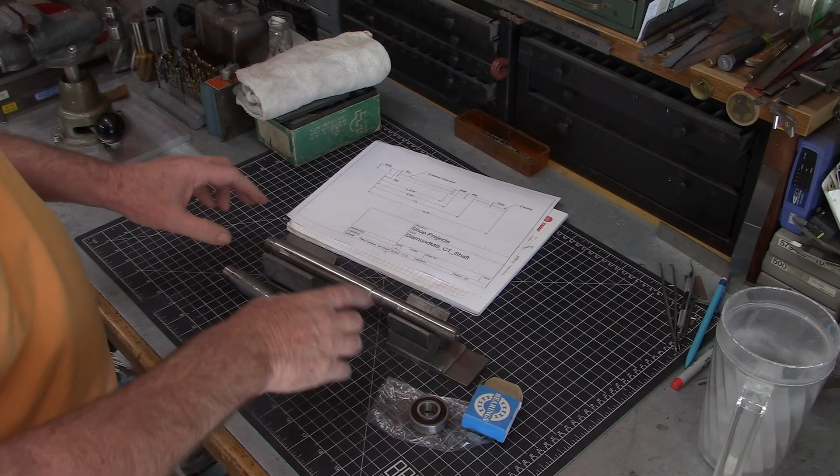Hey guys, alright so this is our countershaft for the diamond mill. Remember we had a problem with this, and I was going to go ahead and just duplicate and make another shaft. I've made a hand sketch and also one in Fusion. I need all the practice I can get in Fusion, so I always try to draw stuff in Fusion when I can. Yeah, so the problem with this shaft is the bearing fits are worn.

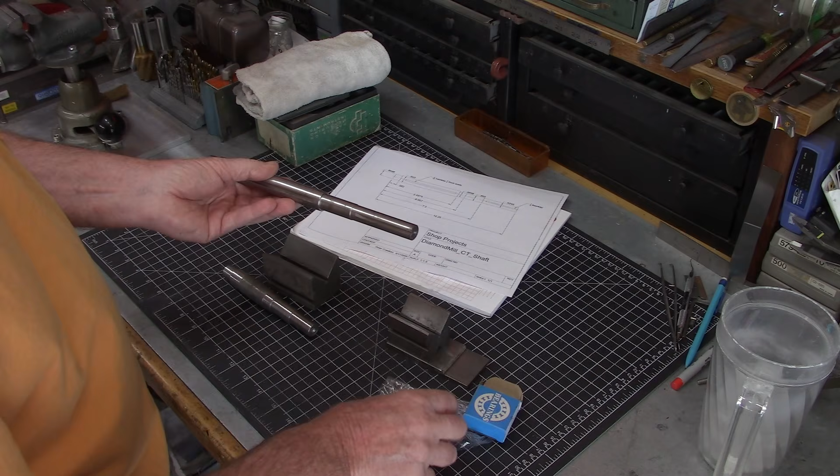So that should be a press fit, and it even rattles on there. It's quite a bit of wear. This end not as bad, but still not acceptable.

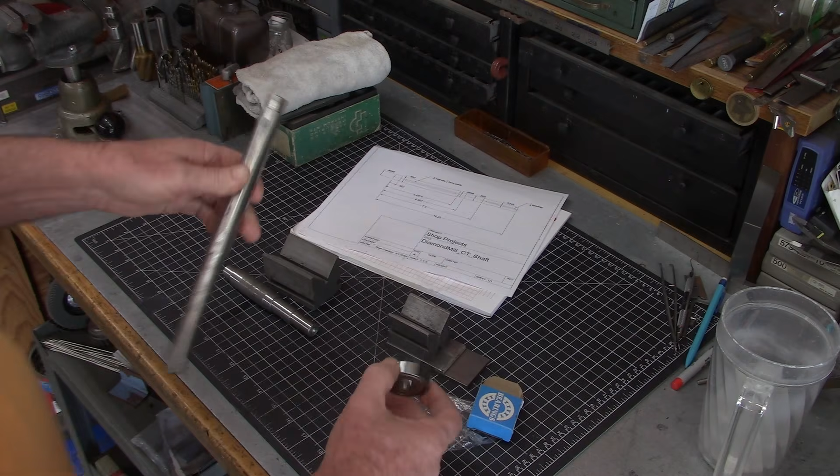So my first thought was just make a new shaft. You know, it's not that complicated. But I want to try a weld buildup. I haven't done that, and it'd be a good process to learn, so I want to give it a try.

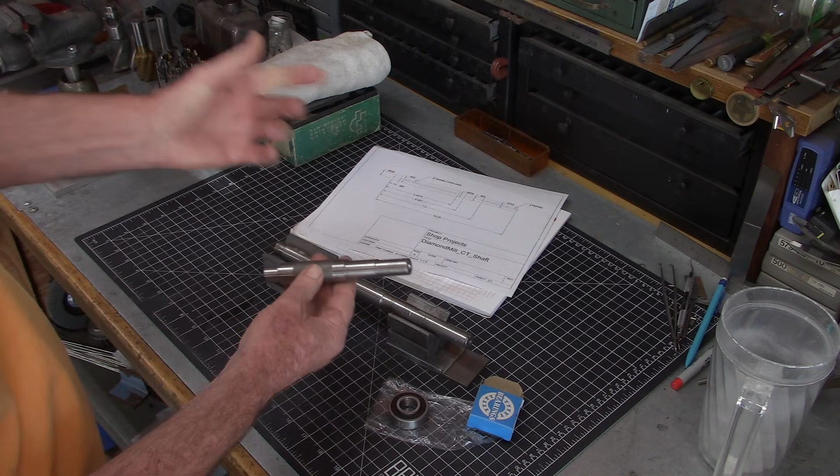I made up a little sample shaft out of just some scrap. I think it's just mild steel, to do a little practice first before we attack this one. Hopefully this is not leaded stock.

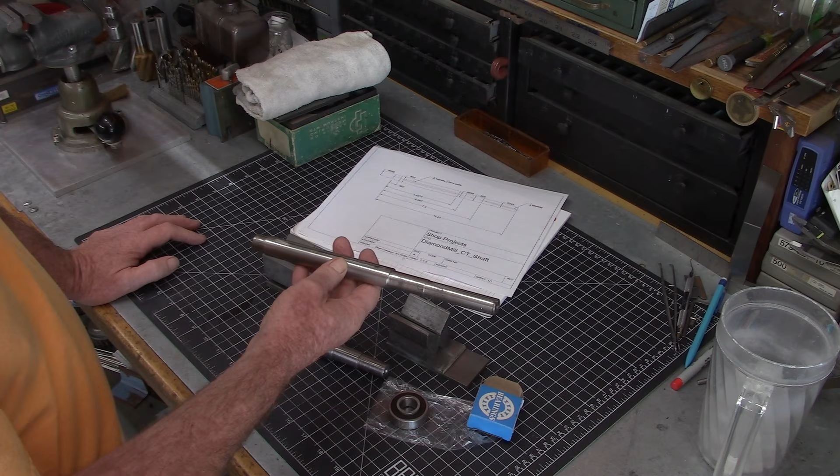You're not supposed to be able to weld leaded stock like 12L14. I don't know what type of reaction it would give you, but I guess we'll cross that bridge when we get there. If we screw it up, we'll just make a whole new shaft.

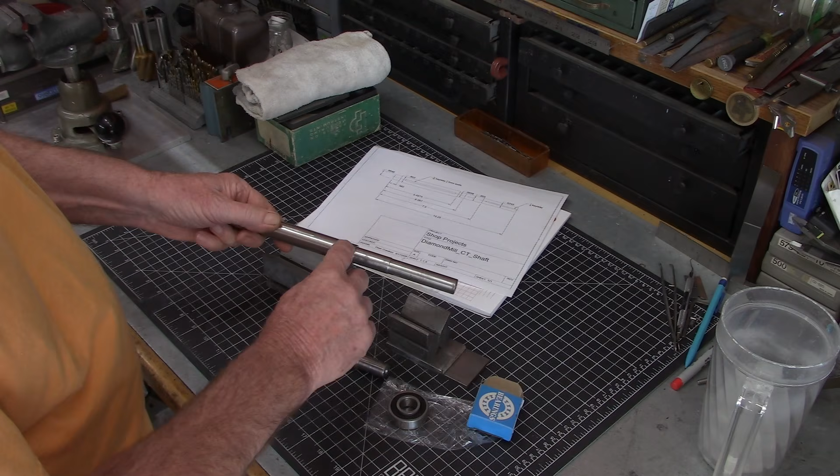The other thing I'm worried about is warpage. So I don't have a welding positioner or rotator. So I'm going to do a bead on one side, rotate 180 degrees, do another bead, let it cool, come back, and just keep working my way around back and forth until we get it all the way around. Same on both sides. Hopefully that'll keep the warpage to a minimum.

Okay, all right, well let's take a look at the welding equipment.

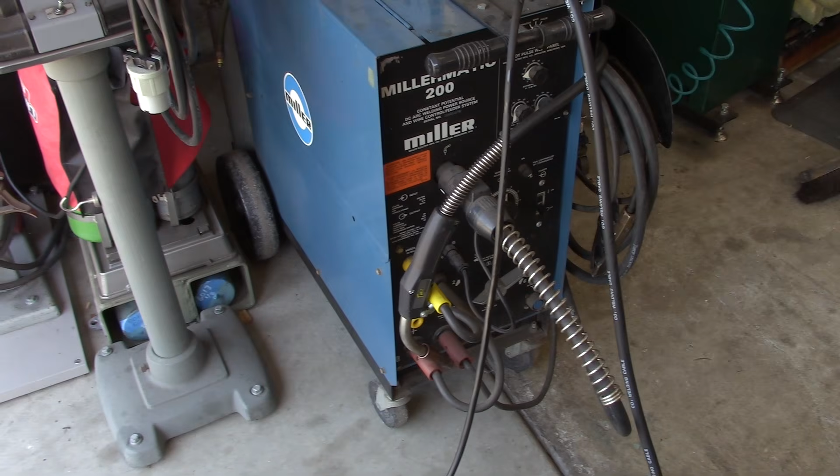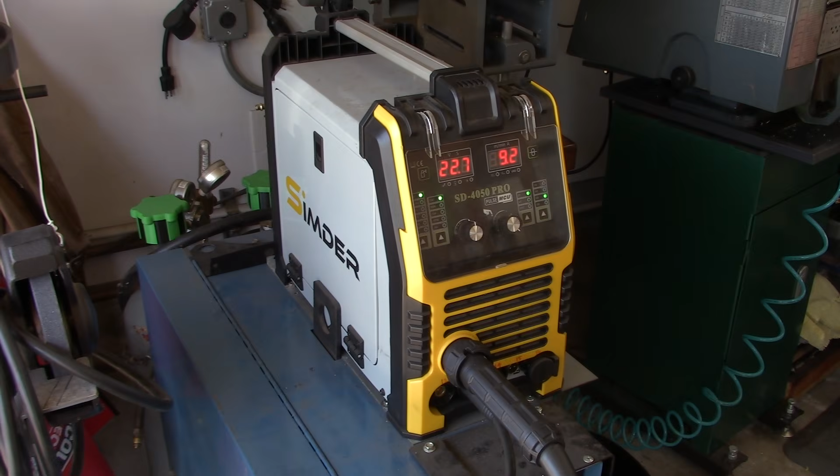So normally I use the big Millermatic 200 for my MIG welding, but it's kind of overkill for that small shaft. So I've got this little Simder, but I normally just use it for TIG welding, and it does have MIG capability, so I went ahead and put on the MIG gun. And I've been running a lot of test beads to get the settings dialed in. I think we're there. I'm using CO2 gas with .030 solid wire.

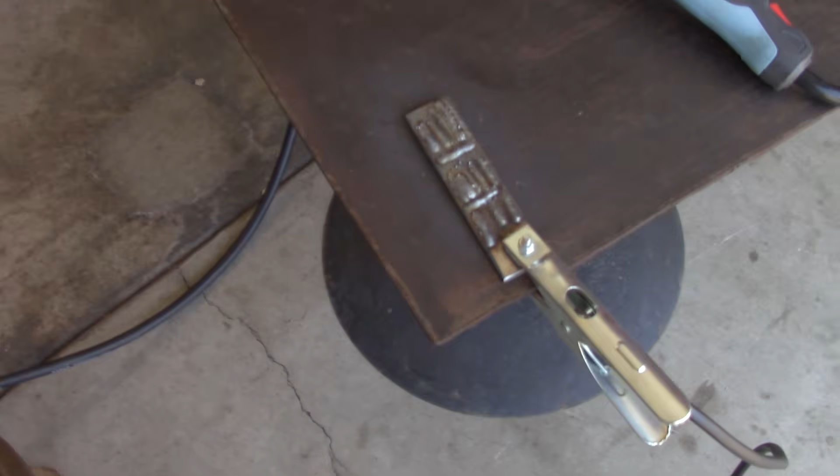So yeah, you can see I've been running some test beads. I think I got it pretty good, so we're going to do that little test piece first.

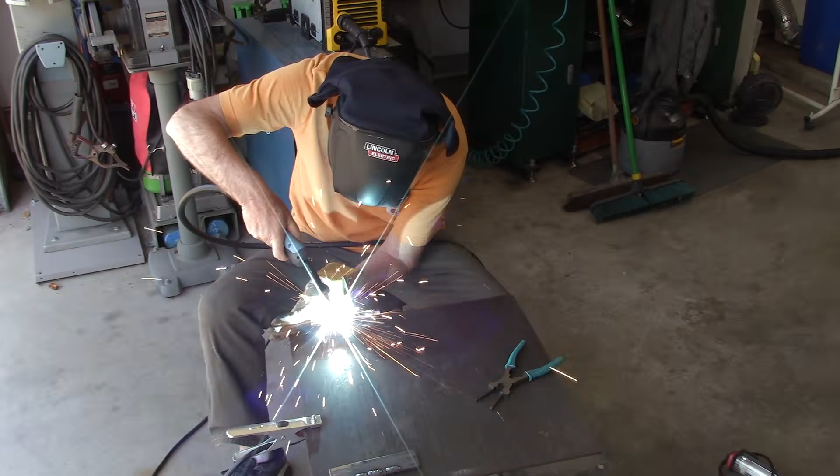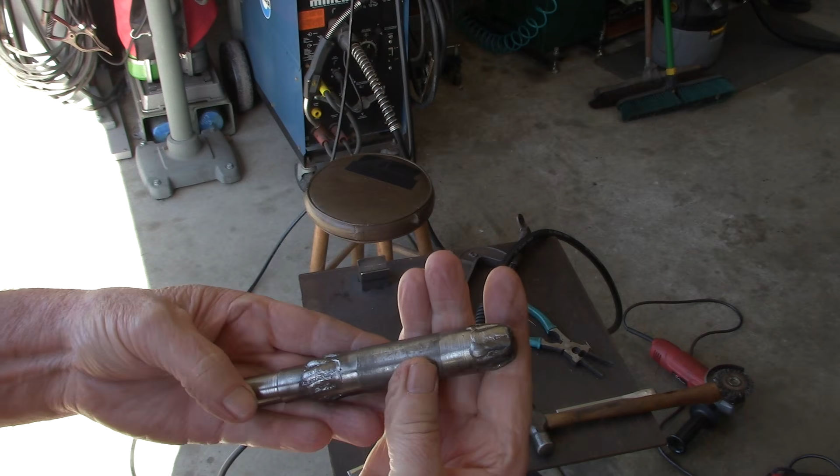Alright, well we're certainly not going to win any beauty contests. And I had one lapse of concentration over here and went too far. I don't know what happened. And I think we're okay there.

Alright, well I'm going to put this in the lathe and we'll take a few cuts and see if we have any porosity. Did undercut over here, but on our actual piece that won't hurt anything. This side is much better.

While we're waiting for this to cool, so this is looking much better than the other end. Almost no porosity at all. Little tiny spot right there. I think that'll clean up.

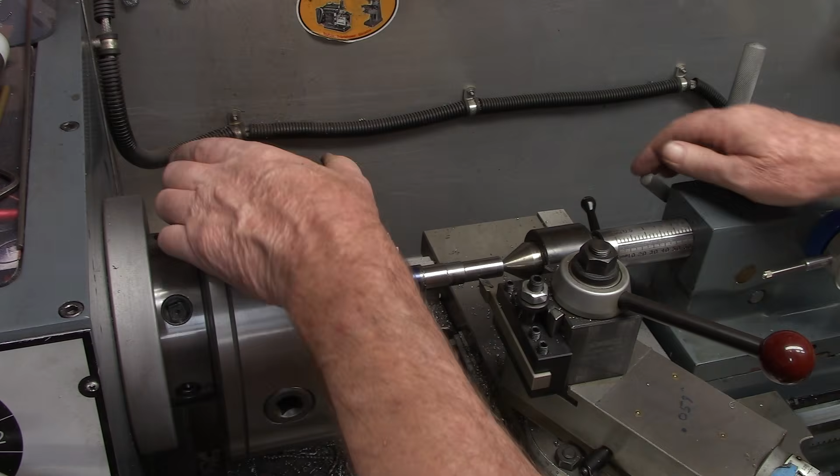So, moral of the story is don't be afraid to add some weld. I was going a little too conservative on the other end.

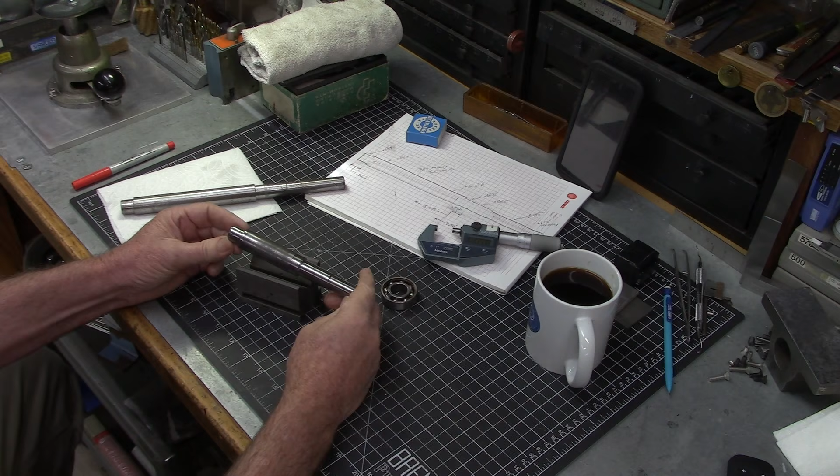Well, I'm really glad I decided to do a sample piece first, or a test piece. Definitely learned a lot. The first thing was I was short on my build-up. I put a little bevel on the end here, but I was definitely short on my weld build-up on the end. Needed to get a little more out there.

We ended up with some porosity. Not horrible. I mean, it would be, you could still use it. Functionality would be okay, but we don't want to have that.

And then this side, I had plenty of buildup. So almost, I don't think there's any porosity. Maybe a couple little pinholes under the magnifying glass. But I ended up with a lot of undercut where I was ending my weld.

I just came over and I just stopped. I should have came over and let it fill for another half a second before stopping the weld to give it a little more bead thickness. So I'll do that on our final one.

Warpage, there is a slight amount of warpage. When it was in the lathe without the center, it was moving a little bit. So when we go to this one, we may have to do some shaft straightening, more than likely. And then trying to hit the dimension, this side I overshot, so it's actually a sliding fit now, not a press fit.

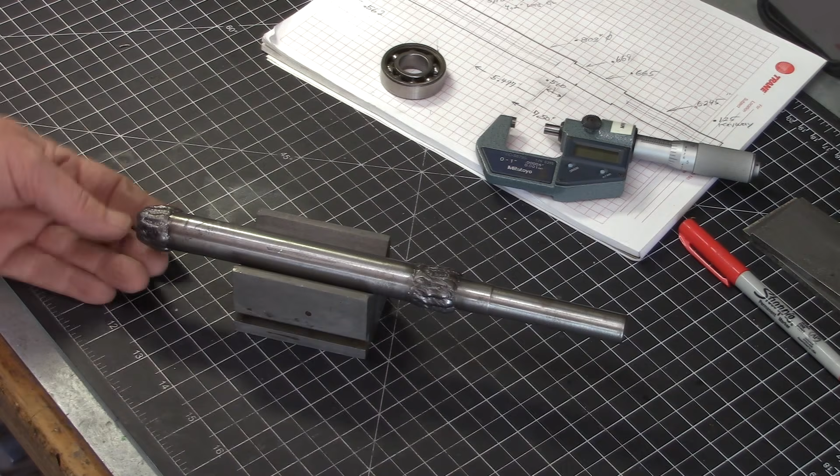All right, well, considering my welding skills, or lack thereof, I'm pretty happy with the results. Still need to check to see, I'm sure we got some warpage throughout all that process, but I think we got a pretty good buildup. I tried to reduce the amount of undercutting from our test piece that we did, so I think we're going to be all right. Let me put this in the lathe and see what kind of run out we got.

Not horrible. Let's put an indicator on it. All right, pay no attention to the broken crystal on the indicator. I grabbed this one because it's got the large foot on it, and I'm too lazy to switch over to a different one. I'm going to have to do this in the 4-jaw at some point, but I'm just getting a rough idea right now.

So we've got run out on the chuck jaws, so the shaft, if we rotate, is doing this, right? But it's straight in the axial direction. Let's see, do we have room to rotate without hitting the jaws? Let me come back this way a little bit. Okay, yeah, all right, well, we got a little more room. Okay, so yeah, oh, forgot about the keyway.

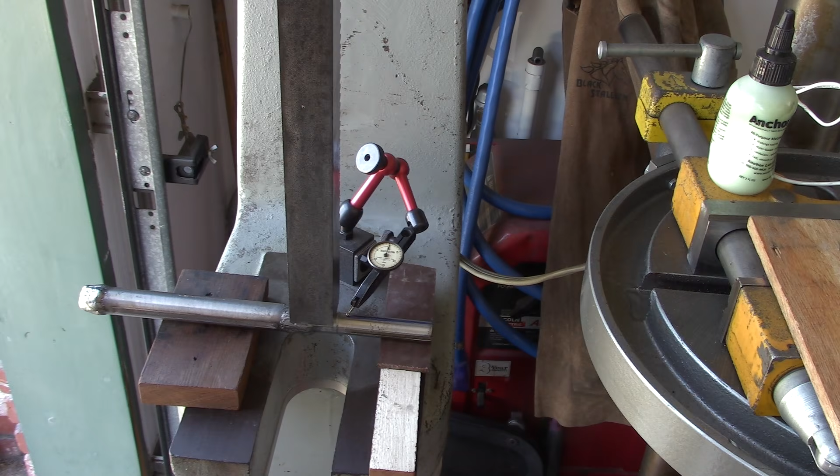All right, this is my setup, just kind of winging it. Got an indicator on here so I can see how much spring back we end up with. Ooh, that might be enough right there. Let's just go a little bit more.

Okay, put it back in the lathe. I just had it in the lathe. That last little tweak didn't do anything, so let's give it a little more this time. That last one only took out 1 thou, so let's give it a little more. Let me reset our zero. Close enough.

Okay, let's try that. All right, I got to get a little more aggressive. We're not getting anywhere. All right, let's try that. All right, so after about 35 times in and out of the arbor press, we're going to call this good for now.

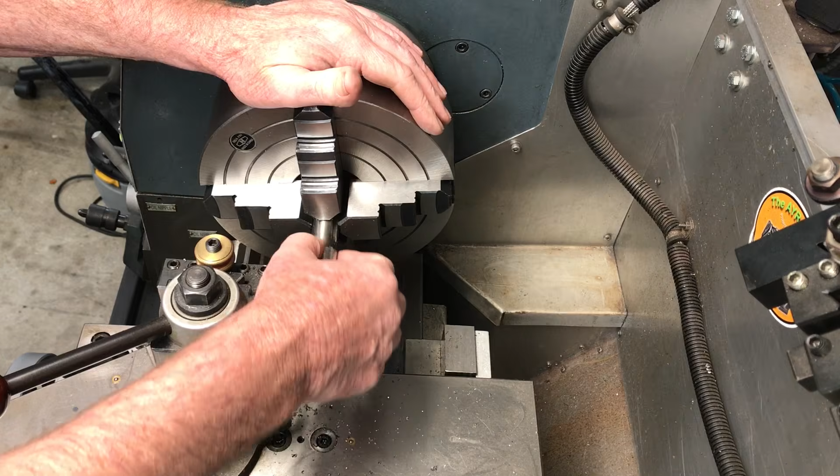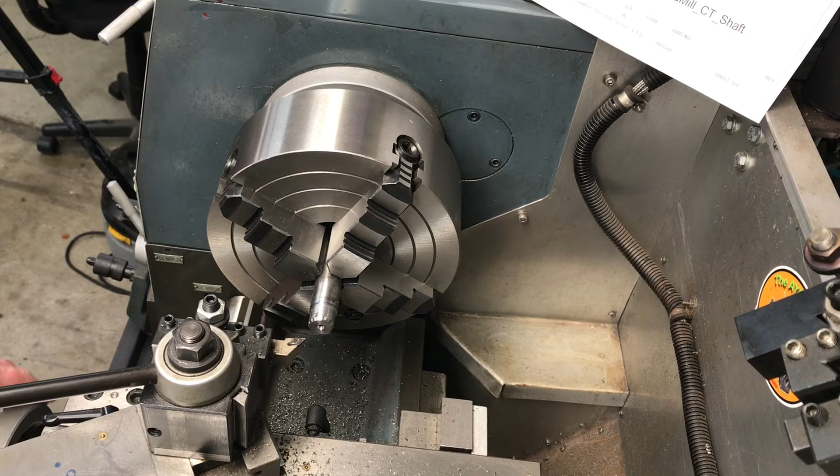Real close to blending. Okay, I'm going to try to do this in 2 more passes, and we're going to speed up a little bit here, see if we can get a better finish. Here we go. Let's use a little bit of oil.

Okay, I'm going to take another measurement. I do not want to overshoot this. 6696. 6694, okay, it's a little warm. I'm going to let it cool for a minute. Okay, this should be the last pass. I'm going to try to get it all in one here.

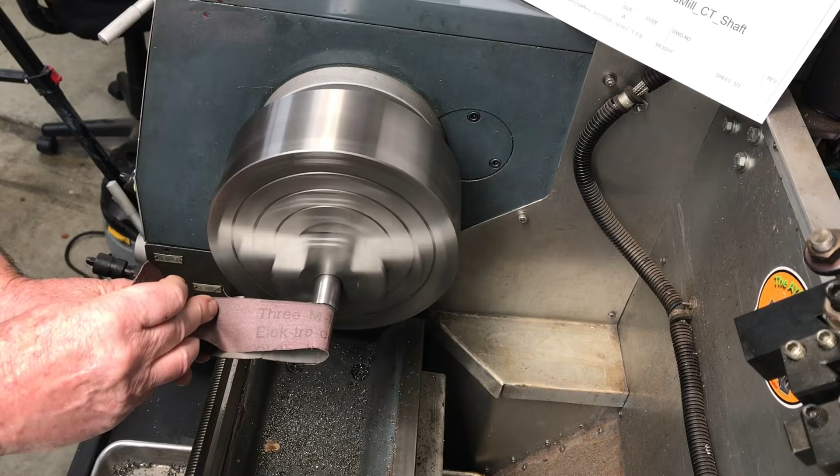And we're there. Okay, put a little chamfer on there. Okay, this should be it.

Well, I wish the finish was a little better. Might be the end of that insert. Okay, well, let's see how we did. Oops. Okay, well, we're over. It's got a little taper to it. More than a little.

Okay, so off camera, what I figured out is this area is a lot harder right by this where the old shoulder was. The weld is much harder for some reason, so our cutter was pushing back a bit. So I came in with a piece of high-speed steel and just kind of finessed it a little bit and cleaned up that little bit, and a little bit of file work. And I think we're pretty good now. Let's take one more measurement.

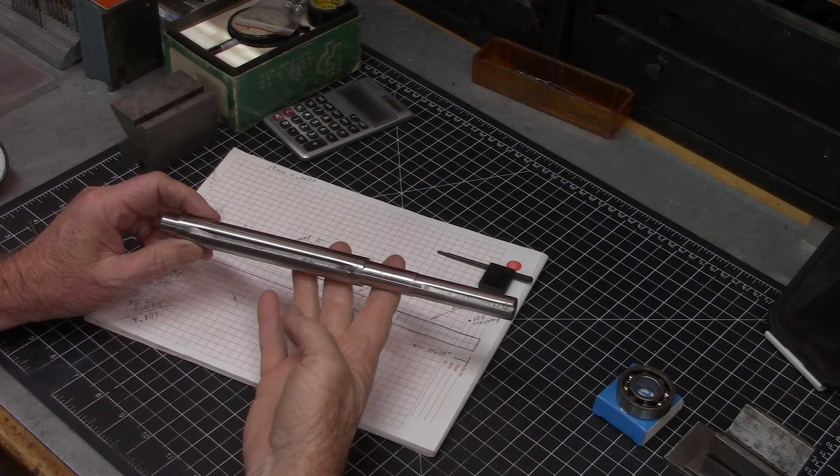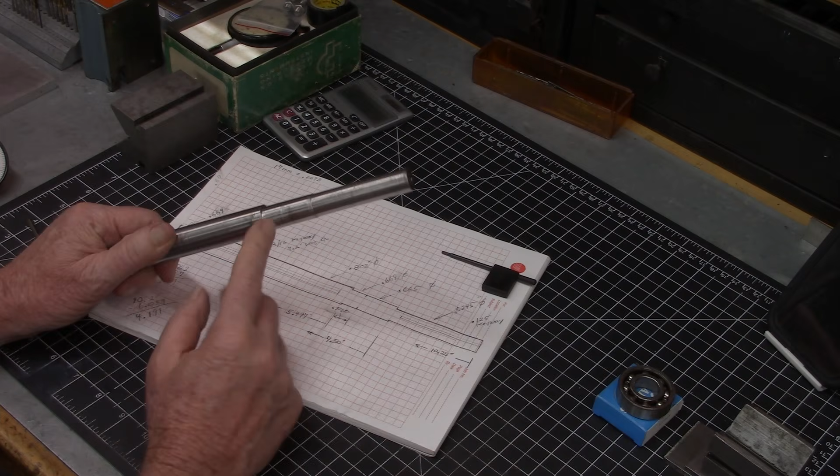Well, that was a bit of an adventure. I'll tell you, all things considered: setting up the welder, doing some practice welds, making a practice piece and doing some practice welding. I even ran a few more beads before I did the real thing here. You know, it all takes time, and then the turning and contemplating and so forth. I think it would have been quicker just to make a new shaft, but I wanted to take a shot at doing a weld buildup for a bearing fit. I've never done that before.

The area looks pretty good, one little itty bitty spot there with some porosity. The thing that's weird, I don't know how you deal with this, where the weld undercuts where you stop. I guess you just have to try to build it up a little bit bigger, but that's not going to hurt anything.

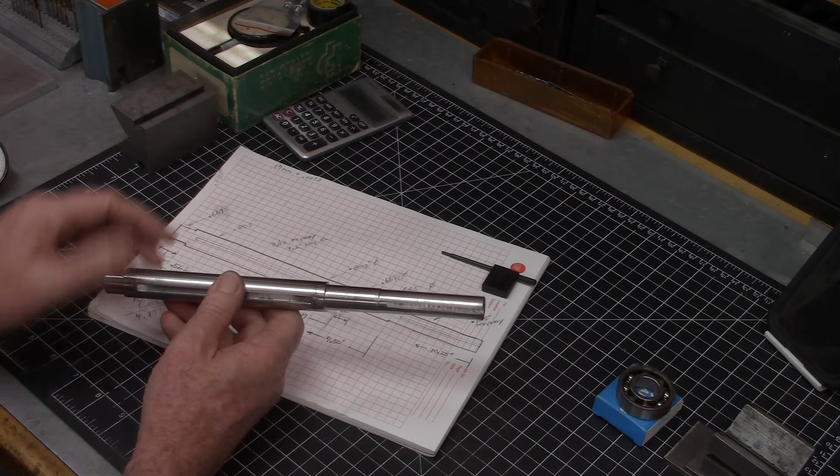This end, pretty much the same thing. We hit our dimension by accident. I was trying to leave, well I did leave, maybe a thou for filing, but I thought I was stopping way before that. Measured it and almost overshot, but did okay.

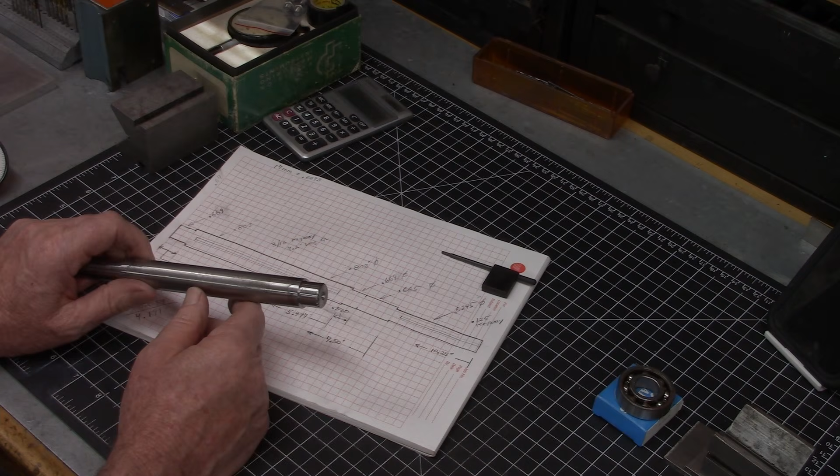Yeah, just fine-tuned with the file. I mean, I figured a half thou for the press fit.

It's not easy to find information. I was trying to look up a bearing table that gave you the recommended fits, and I didn't come up with anything. So I just, you know, I didn't want a real tight press fit, so I figured a half thou should be about right.

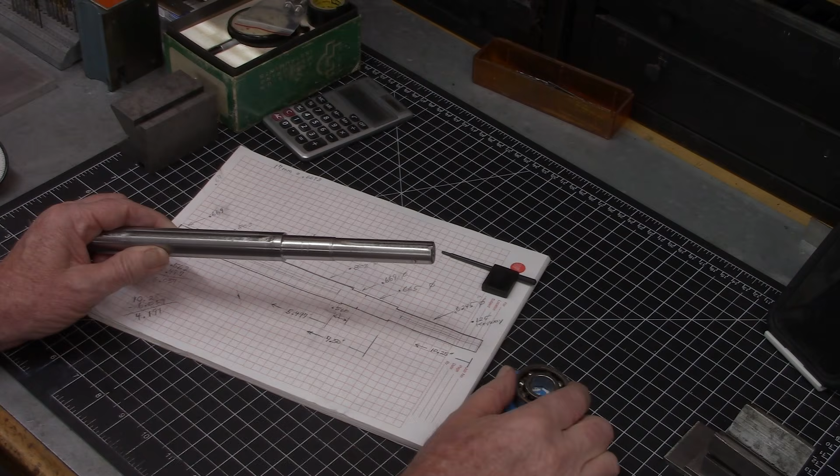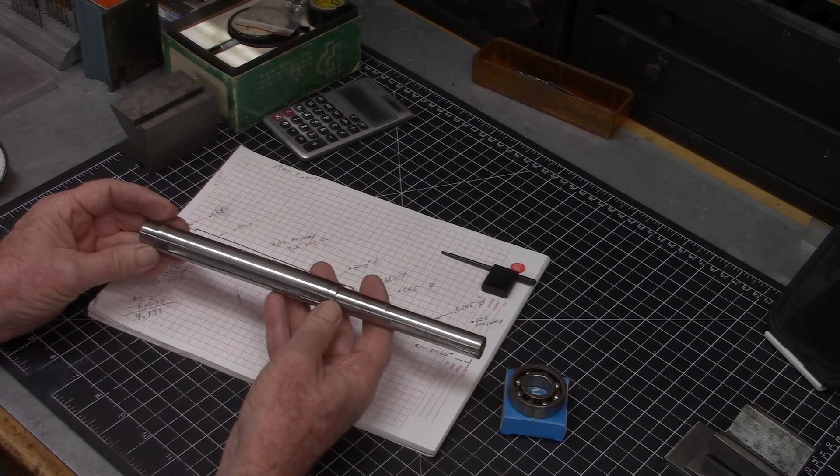And then we got a little bit of runout in here, so it's still not perfectly straight. It's about 4 thousandths out here at the end. So I don't know, it's a belt pulley, okay? And the original pulley that was on this end was the one that was way out of balance, so I mean, it's got to be probably better than what it was.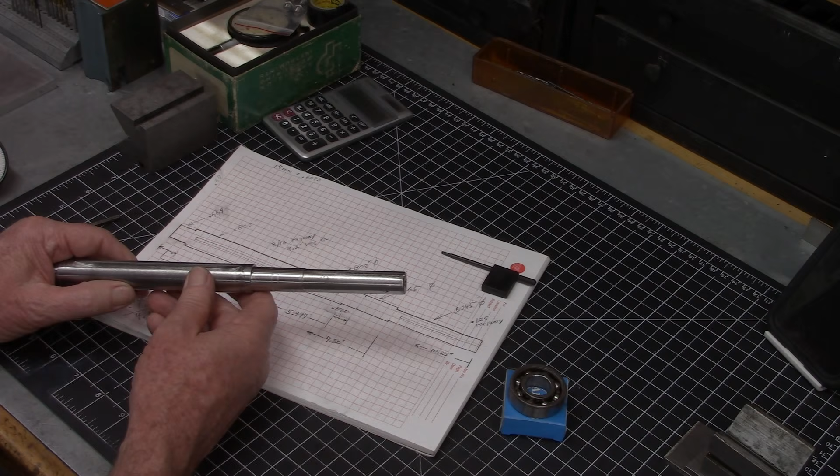So I think it's going to be okay. I think I'm just going to go ahead and put it together. If I try to get that last 1 thou or 4 thou out of it, I'll probably end up making it worse or chasing my tail. So yeah, I think we'll just go with it.

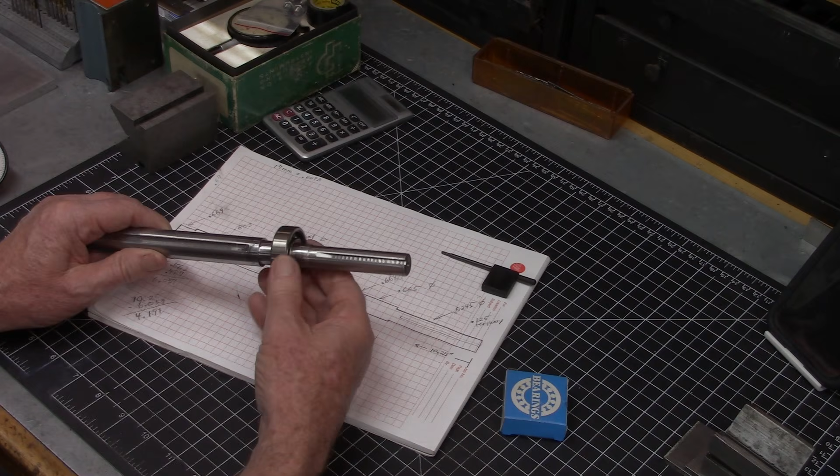The bearing fit I think is going to be pretty good. This is not the right bearing, it's an old used bearing, but it's the same dimensions. Yeah, so.

Well, anyways, that's another thing checked off the list. This one just definitely took a while just to think about it, and then finally getting a few days with nothing else planned where I could work on it.